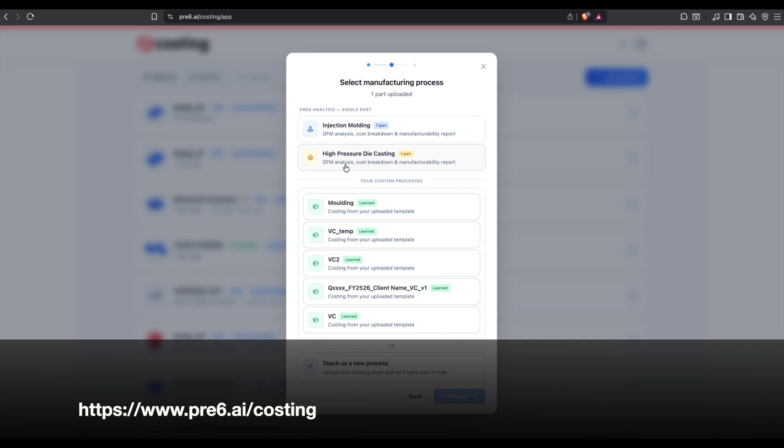We can also learn a new process from your Excel files, your Excel templates, but those features are not DFM powered. If you want to experience DFM powered costing, we need to select either injection molding or high pressure die casting. However, a lot of manufacturers have a lot of subsidiary processes which require a simpler costing process. And for that, we have this option where we can learn from your costing sheet. However, for this particular demo, I want us to focus on an inbuilt DFM engine. Let's go with injection molding.

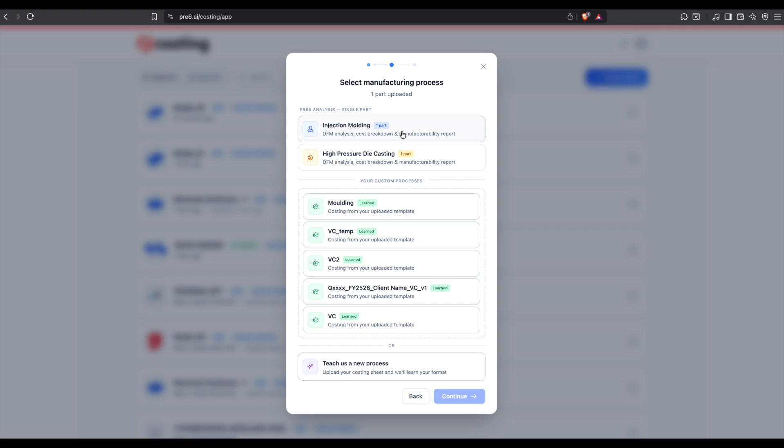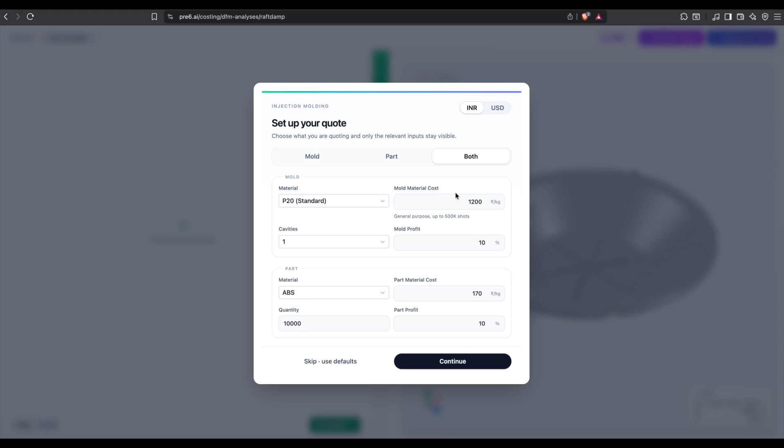I click continue. Within a few seconds, the software will analyze the file we have uploaded, will ask basic questions to set up this particular quote, and quickly it will be done with a cost. So I'll go with whatever the default is for now. You can either click here, change the material of the mold, change the material with which you want to manufacture the part, enter the right cost. All of this can be learned instantly. I need to click continue.

Now, this is the part that I have loaded in my browser, and you can see I am on pre6.ai/costing, and everything works completely smooth. Right now, what is happening behind your screen is the part is getting scanned, material properties are getting loaded, features are getting detected, estimation is happening, and finally, a cost will appear in front of us in no time.

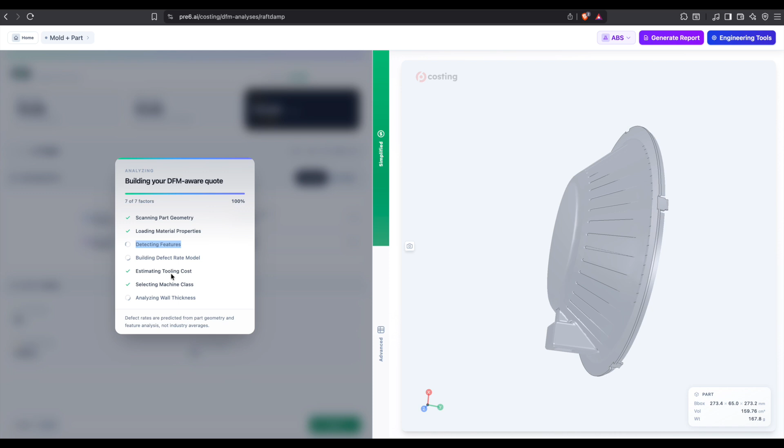Software is estimating around 10.3 lakh rupees for mold cost, and the total order value is 16.5 lakh rupees. This includes the mold part as well as the material cost. And adding the 10% margin, the final value of the order becomes 18.2 lakhs.

I'll also show you the breakdown of how we arrive at this particular cost and what considerations this software takes into account. So I can go to this order summary and we can see cycle time is getting auto calculated. Material is getting auto calculated. The machine time gets auto calculated. If we go to user inputs, we can see machine tonnage has been auto calculated for us. Also, the number of cavities is being recommended. I'll show you how these things work, how the cycle time gets calculated, for example.

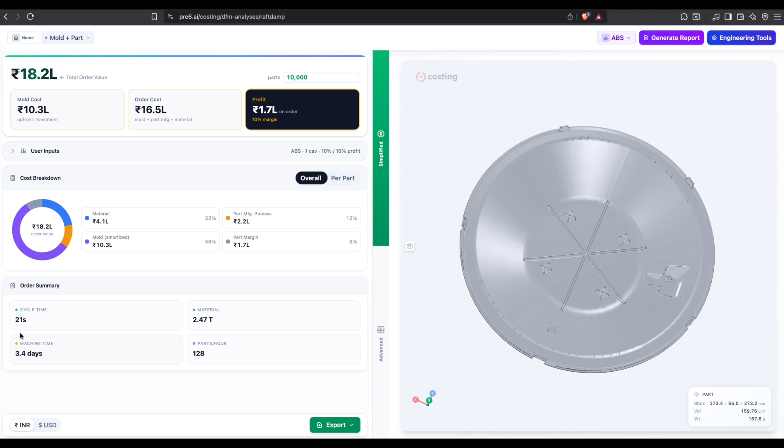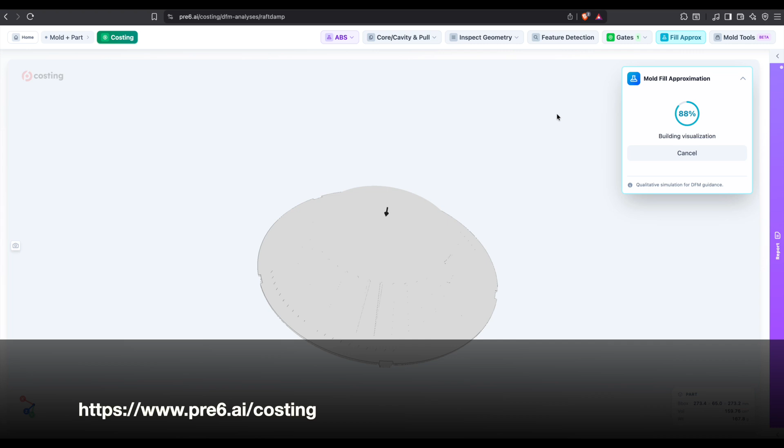So I can click engineering tools. We have our own inbuilt DFM engine as well as the fill approximation engine. I can click gates here, auto detect best gate, click fill approximation again, and within no time, you can see how fast the engine runs the simulation and comes up with a result. It offers insane iteration time for your team, which has never been seen before in the industry. We can see how the fill is happening in this particular part.

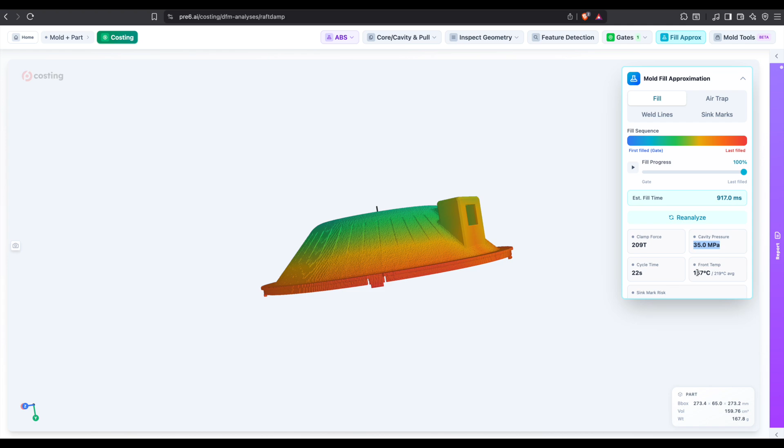And on the basis of this particular engine that we have built, we are able to calculate the cycle time, the clamp force required, the cavity pressure, the front temperature, everything. We also try to predict weld lines if they come at any location, air traps, the potential areas of sink. Everything gets calculated for you instantly.

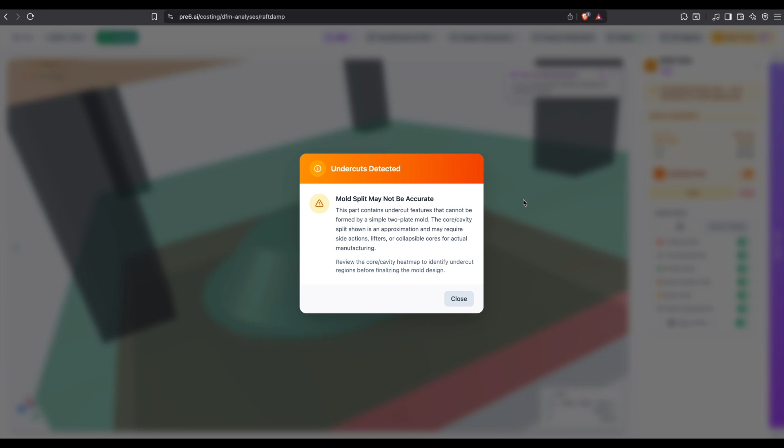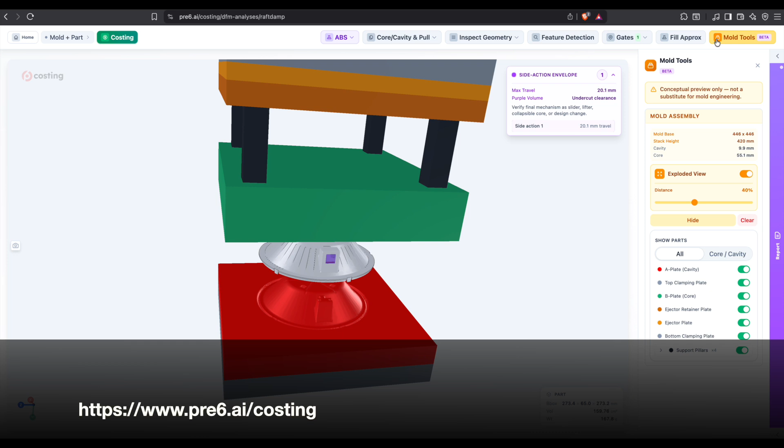I'll also show you one magical feature. I can click mold tools here, generate mold assembly, and within no time, the whole mold assembly will be generated for us with the correct identification of the areas where side action needs to happen. So if I click exploded view, we can see how the mold of one cavity is going to look. All this kind of intelligence goes into the costing platform, and that is how we are able to come up with the right numbers.

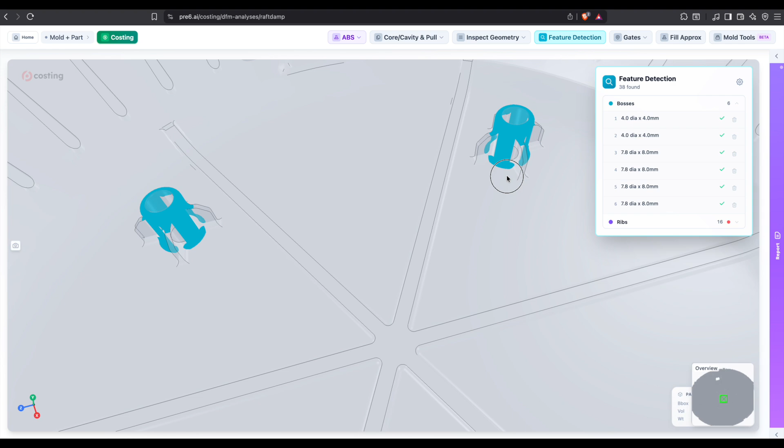I'll also show you one more thing the system learns. So we can click feature detection and we can see all the bosses, the ribs, the holes, all these things get highlighted. If I click bosses here, we can see the system has learned these particular things are bosses, these particular things are ribs. So based on these detected features, we make certain assumptions in the machine time. We'll see all those things. Let me go back to costing.

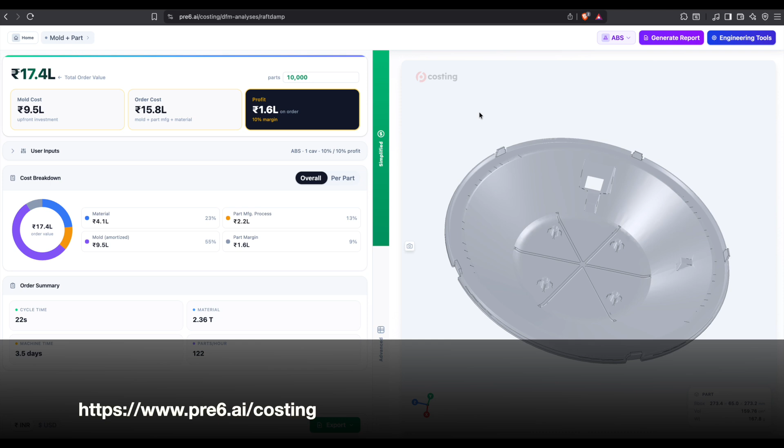Whatever we have seen so far, how the mold is being predicted, the fill time, the slider lifter location, the other things like draft angle analysis, which happens like this, the automatic core cavity split, which happens in no time. All these kinds of information help us to come to costing, and then the final number comes on our screen. So let's go to the advanced tab to understand more.

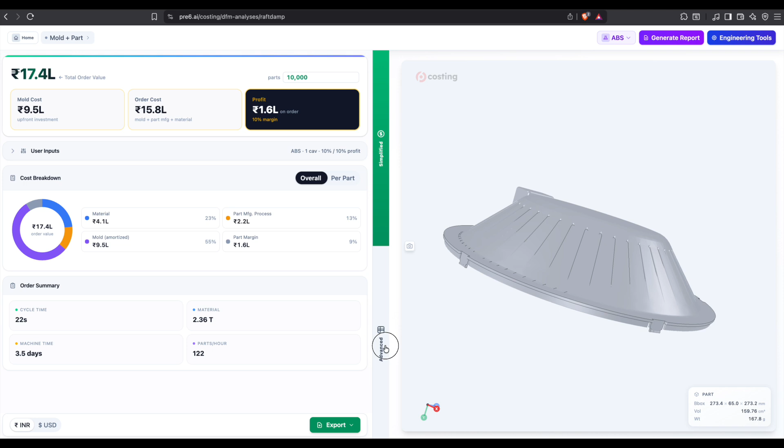So from the fill approximation, we got the values we are seeing here on the screen. Let's go to the advanced tab and we can see the mold base getting calculated based on the geometry of the part we have supplied. The base plate, if we are reusing the existing base plate, we can just click here. If not, then it will automatically calculate it for you. Then we can go to cost drivers to understand more about how the costing is coming.

So base mold cost calculation, cooling and welding calculation, the surface finish requirement. So it is coming as machined. If we want to change it, we want light polish, we want EDM textured finish, we want some custom requirement, we can just put the values there and the value will get added. Then we can also see we have got machining and design.

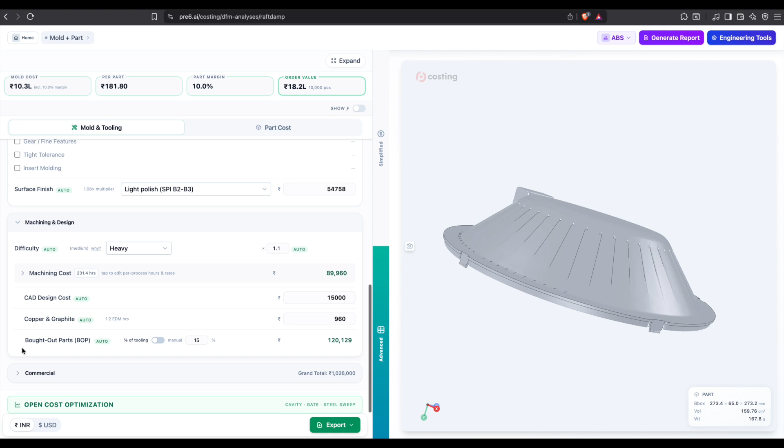This is such a feature-rich part that it is getting predicted as a heavy difficulty mold which will be required to be machined. Hence, the machining hour is taking everything into account. The setup cost based on the features we have seen, what will be the CNC hour, what will be the EDM hour, what will be the milling hour, everything gets calculated based on the features which are present in the particular part.

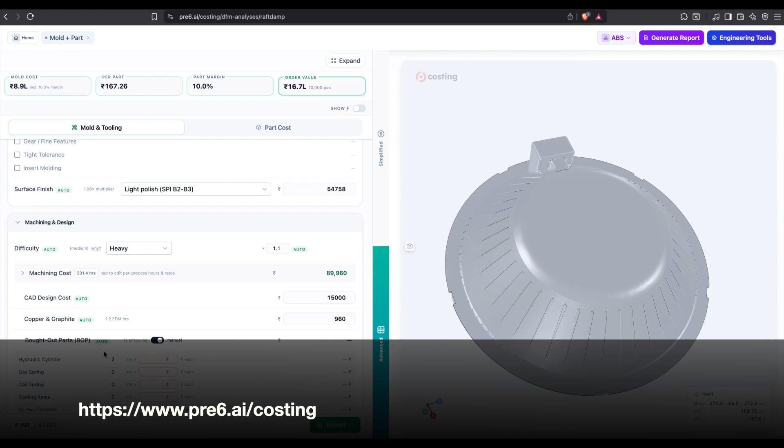We also have bought out parts. Here we are seeing that the machine predicts what will be the number of ejector pins which are required, what are the number of sliders which are required, the cost of which can be filled from whatever provider of sliders and lifters we are getting these costs from. Or if we turn it off, by default, the system calculates a 15% add-on on the overall cost we have calculated so far.

Then we also have commercials where we can set profit margin, we can have trials, number of trials, whatever we want, the part inspection hours and the cost of inspection. Finally, packaging, transporting, all those costs can be added, and we are getting a grand cost of 10 lakh rupees for this particular part and this particular mold.

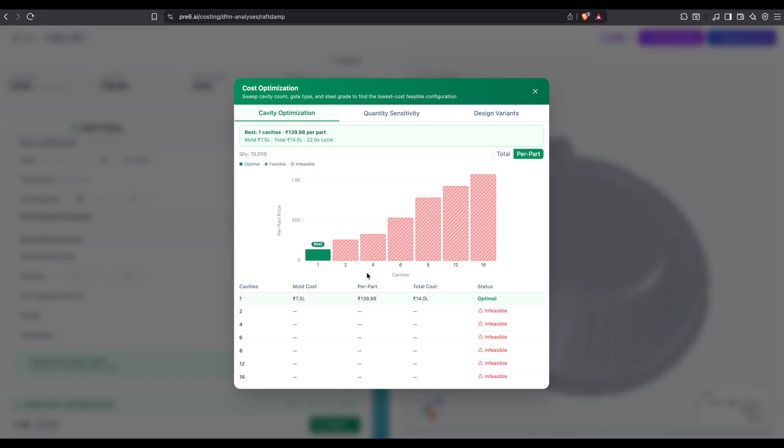Now we also have an option to open the optimization button here. So if I click here, it tries to tell us that depending on the part we have given, depending on the quantity we want to manufacture, how many cavities should be there in your mold to get the most revenue from this particular order. So for these 10,000 parts, one cavity is sufficient, and the two cavity, four cavity, six cavity options are not feasible. Maybe if we want more quantity, this cost optimization will get tuned automatically.

Now let's go to part cost. I'll click here and we will see the unit cost for the particular part. This 181 rupees is actually the manufacturing plus tooling plus 10% margin cost. This 68.965 is only the manufacturing cost plus the 10% margin, excluding the mold amortization. So we are able to see all the cost in all the different ways possible.

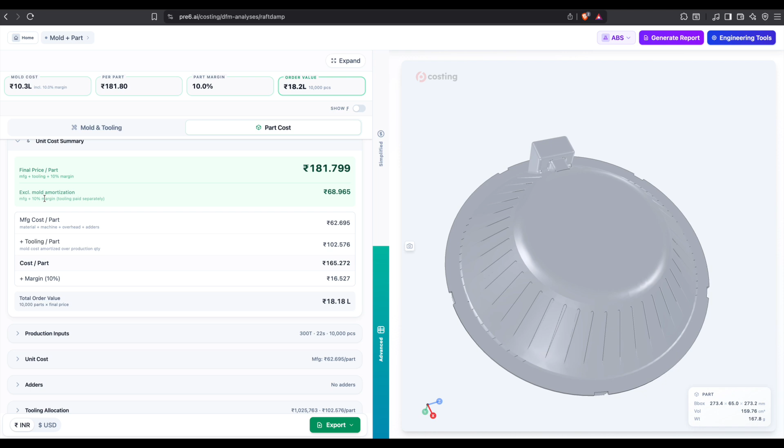Now, I'll also show you the different types of inputs or the intelligence this system provides us. We can click production inputs, so we can see the clamp force is getting automatically calculated. The machine is something which gets automatically calculated based on the inputs the software has detected, like the cycle time, the number of cavities we have, the cavity pressure, clamping force.

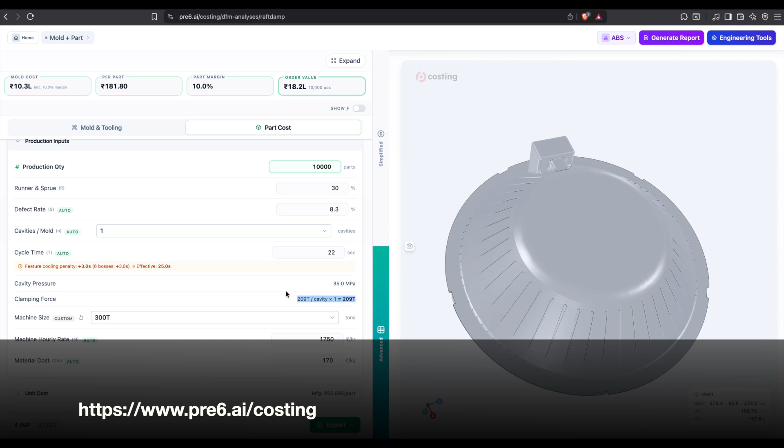The rates of your particular machine are something we learn from you. The software is completely tunable to your shop floor. All we need to supply is the previous 4 or 5 costing sheets to this particular software in Excel form, and all these kinds of cost, the machine hourly rate, the CNC rate, EDM rate, everything gets automatically tuned for your system in less than 5 seconds.

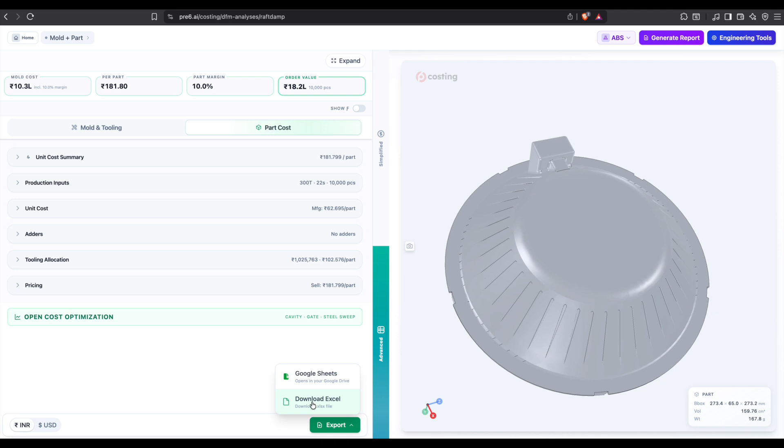We can also click export here and get either a Google Sheet or an Excel sheet downloadable with all this breakdown of mold and tooling cost as well as part cost and the summary out of the box in no time. That is what we have built at Pre6 Costing.